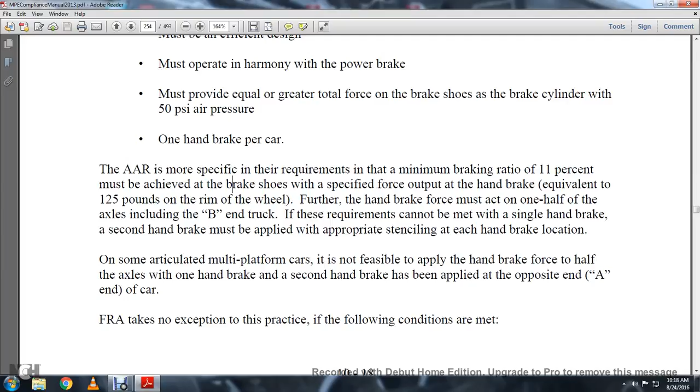The Association of American Railroads specified this requirement: a minimum braking ratio of 11% must be achieved at the brake shoes, with specified force output of the handbrake equivalent to 125 pounds on the rim of the wheel. Further, handbrakes must act on one half of the axles, including B end of the truck. This requirement cannot be met with a single handbrake.

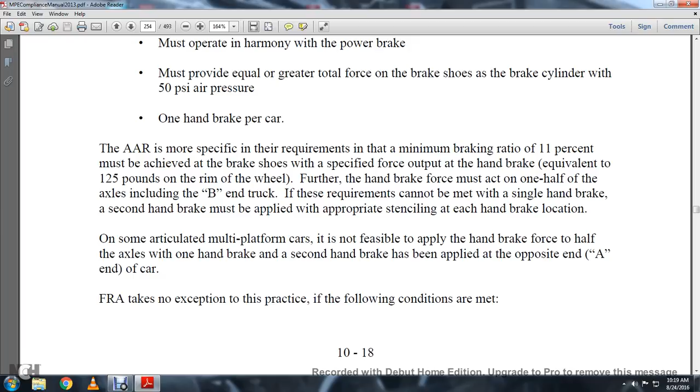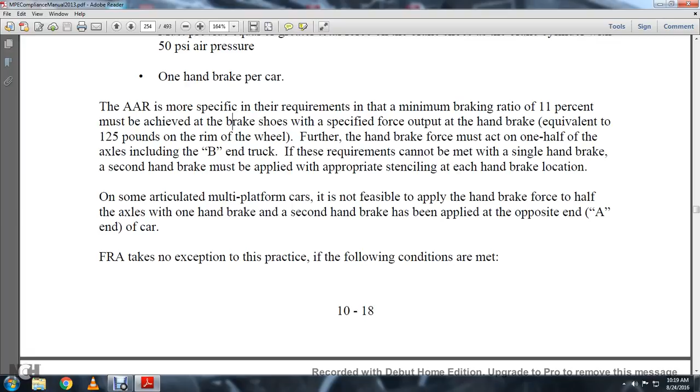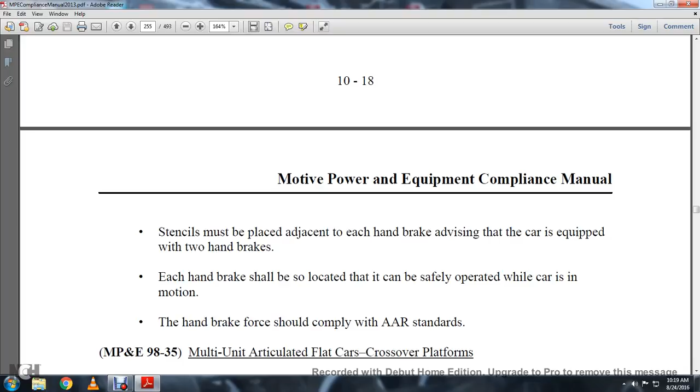A second handbrake must be applied on appropriate stenciling at each handbrake location. On some of the articulated multiple platform cars, it's not feasible to apply the handbrake force to half the axles with one handbrake, and the second handbrake has been applied at the opposite end, the A end of the car. The FRA takes no exceptions to this practice if the following conditions are met: stencils must be placed adjacent to each handbrake, advising the car is equipped with two handbrakes. Each handbrake shall be located so it can be safely operated while the car is in motion, and the handbrake force should comply with AAR standards.

Motive Power and Equipment 98-35. Multiple unit articulated flat cars, crossover platforms, trailer train companies or TTAX. 5-unit all-purpose spine cars are equipped with handbrakes and face outward at each end of the 5-unit consists. The handbrake arrangement is designed so that it can be operated while standing on a sill step or from the ground.

When a 48-foot container is placed on the A end of the unit and the crossover platform is partially covered, with the container only 10 inches exposed, the crossover platform extensions on the trailer train company cars, the multiple unit articulated flat cars, are not a requirement of the current safety appliance standards.

Additionally, they are not used for proper operation of the handbrakes. Therefore, the FRA will take no exceptions to the use of trailer train company's 5-unit all-purpose spine cars when loaded with an A and B unit 48-foot containers partially covering the end of the crossover platform.

However, the FRA requires safety appliance support. Safety appliances must be mechanically fastened, with brackets applied to the car structure, other than tank cars, solely for the securement of safety appliances mechanically fastened to the car structure.

Motive Power and Equipment 98-5. Standard level and low level auto racks. Since the origination of the radial door and its application of the auto rack cars. Many clearance problems have developed because of the nature of these, the vertical relationship of the side ladder and sill steps have been altered in such a manner that there are variations, misalignment of 5 to 13 inches.

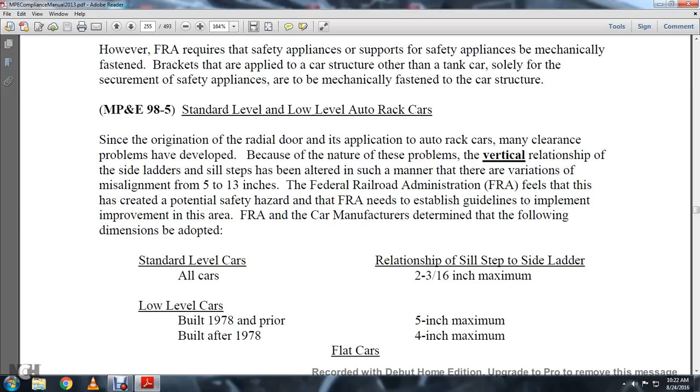Standard level cars are all level; low level cars built prior to 1978 versus built after 1978. The relationship for all level cars is 2 and 3/16 of an inch maximum between sill step and side ladder. For low level cars built in 1978 and prior, 5-inch maximum; after 1978, 4-inch maximum.

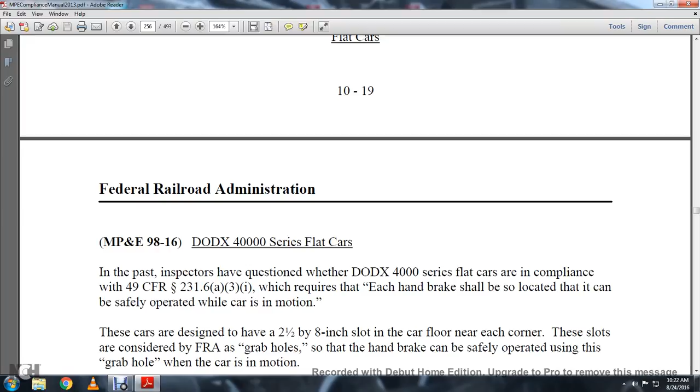Flat cars, Motive Power and Equipment 98-16, Department of Defense X 40,000 series flat cars. In the past, inspectors questioned the DODX 4000 series flat cars for compliance with Title 49 CFR 231.6A31, which requires that each handbrake shall be located so it can be safely operated while the car is in motion.

These cars are designed to have a 2.5 by 8-inch slot in the car floor near each of the corners. The slots are considered by FRA as a grab hole, so the handbrake can be safely operated using the grab hole while the car is in motion.

Also, it had been reported that these cars have a missing bottom rod safety support. These cars are equipped with Buckeye 6-wheel trucks with truck-mounted brakes. Because of the truck mounted brakes, the bottom rod requires safety support, found only on the hand brake truck. Of the two bottom rods, one is equipped with two safety supports, while the other has only one.

The truck, as designed, lacks a bracket and another location to which an effective safety support can be attached to the brake rod. The distance measures 35 inches between the pivot, and loss of the connection between the pin and unsupported end of the rod would cause a drop of 1/2 inch over the distance of 7 inches before it encountered the existing safety support.

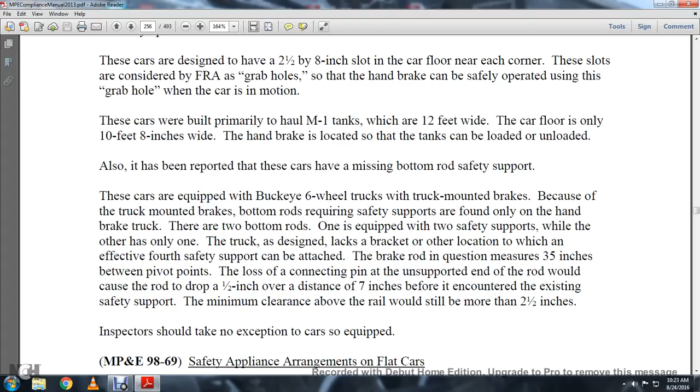The minimum clearance above the rail would still be more than 2.5 inches. Inspectors should take no exception to the cars so equipped.

Motive Power and Equipment 98-69, Safety Appliance Arrangements on Flat Cars.

Statute 231.6 specifies the minimum required safety appliances on a flat car. However, various arrangements have been agreed upon without being incorporated in the standards. There are newly reassigned employees as well as new car builders who may not be aware of these agreements.

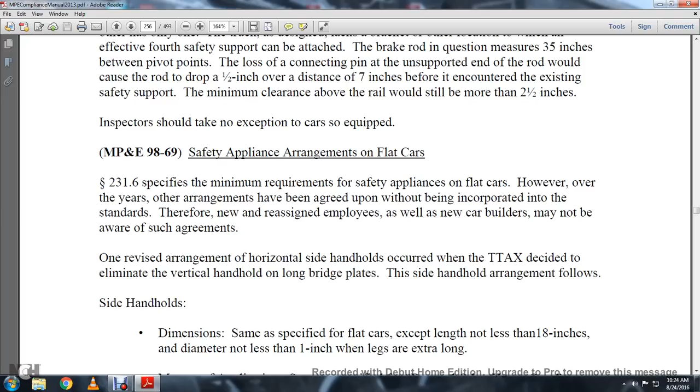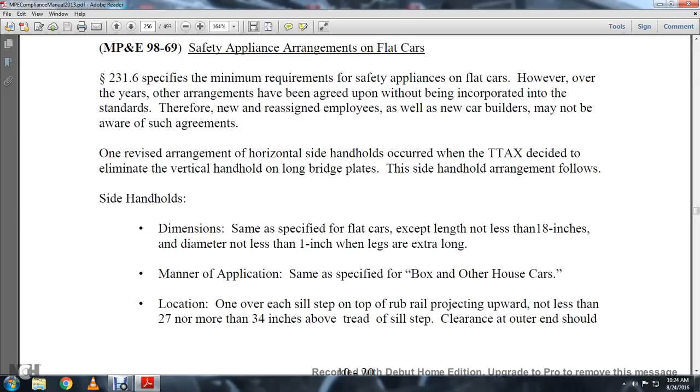One revised arrangement of the horizontal side handholds occurred when the Trailer Train Company decided to eliminate the vertical handhold on the long bridge plates. The side handhold arrangement follows: side handholds dimensioned the same as specified on the flat car, except the length not less than 18 inches, the diameter not less than 1 inch when the legs are extra long. Manner of application same as specified for box and other house cars. Location: one over

every sill step, on top of the rub rail, projecting upward not less than 27 nor more than 34 inches above the tread of the sill step. Clearance at the outer end may not be more than 8 inches from the end of the car. All other safety appliances on piggyback cars should conform with those specified for flat cars.

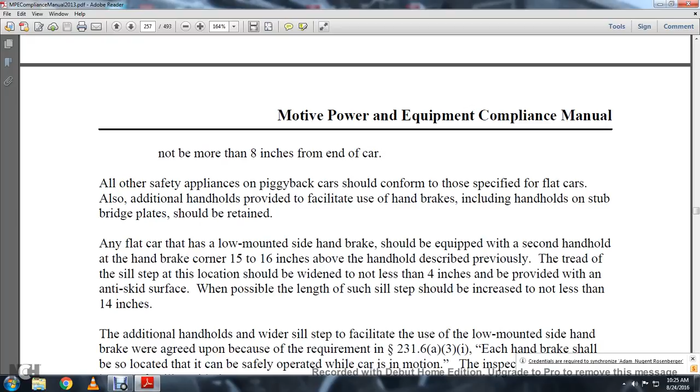In addition, the handholds provided to facilitate use of handbrakes, including handholds on the stub of the bridge plate, should be retained. Any flat car that has a low-mounted side handbrake should be equipped with a second handhold, the handbrake corner, 15 to 16 inches above the handhold as described previously.

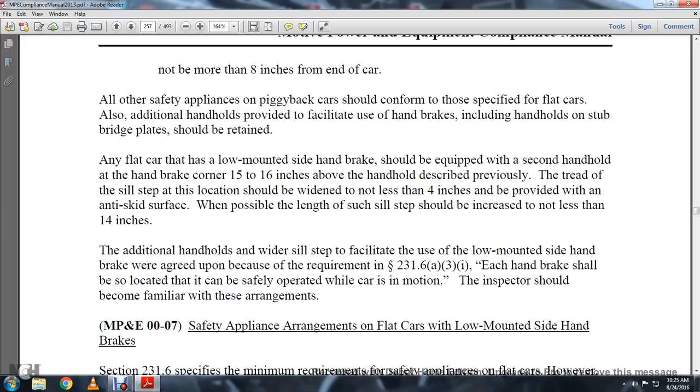The tread of the sill step at that location should be widened to not less than 4 inches, and be provided with an anti-skid surface. When possible, the length of such a sill step should be increased to not less than 14 inches. The additional handhold, wider sill steps, to facilitate the use of low-mounted side handbrakes was agreed upon because of the requirement in

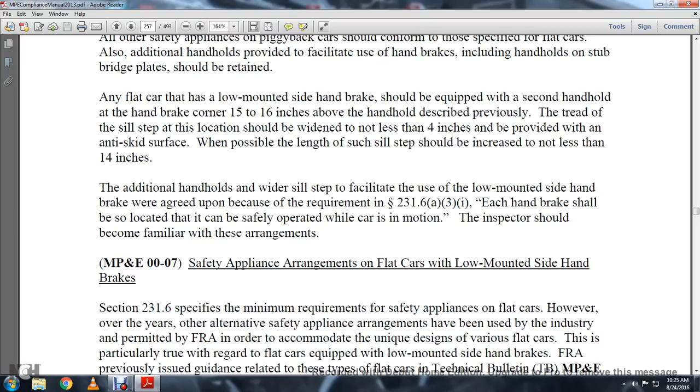231.6(a)(3)(i): each handbrake shall be located so that it can be safely operated while the car is in motion. The inspector should be familiar with these arrangements.

Motive Power and Equipment, Safety Appliance Arrangements on Flat Cars with Low-Mounted Side Handbrakes. Section 231.6 specifies the minimum required safety appliances for flat cars.

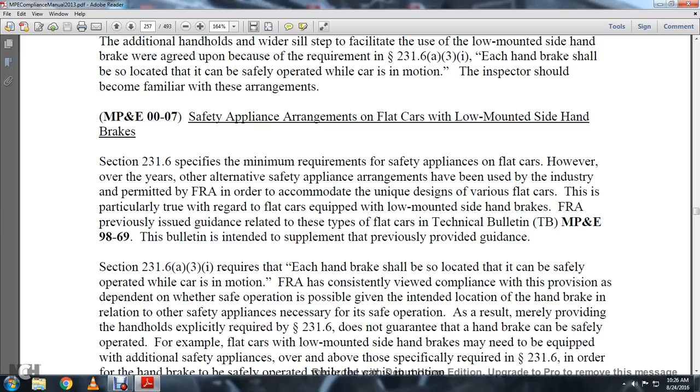However, over the years, alternative safety appliance arrangements have been used by the industry and permitted by the FRA in order to accommodate the unique design of various flat cars. This is particularly true with regard to flat cars equipped with low-mounted side handbrakes. The FRA previously issued guidelines related to these flat cars in the technical bulletin, Motive Power and Equipment 98-69. This bulletin is intended to supplement the previously provided guidance.

Section 231.6(a)(3)(i) requires each handbrake be located so that it can be safely operated while the car is in motion. The FRA has consistently viewed compliance with this provision as dependent on whether safe operation is possible given the intended location of the handbrake in relation to other safety appliances necessary for safe operation.

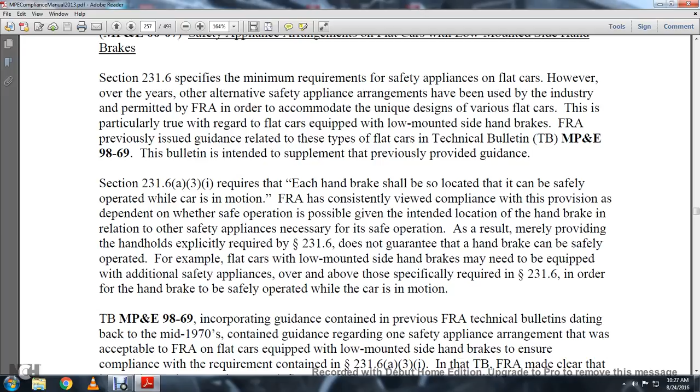As a result, merely providing the handholds explicitly required in Statute 231.6 does not guarantee that the handbrake can be safely operated. For example, flat cars with low-mounted side handbrakes may need additional safety appliances beyond those specifically required in 231.6 in order for the handbrake to be safely operated while the car is in motion. Technical Bulletin Motive Power and Equipment 98-69 incorporates guidelines contained in previous FRA technical bulletins dating back to the mid-1970s, containing guidance regarding a safety appliance arrangement acceptable to the FRA on flat cars equipped with low-mounted side handbrakes to ensure compliance with the requirement in Statute 231.6(a)(3)(i).

In the technical bulletin, the FRA made it clear that it would not take exception to such flat cars if they were equipped with a second handhold at the handbrake corner, 15 to 16 inches above the handhold, located over each of the sill steps. The tread of the sill step at that location was widened to not less than 4 inches and provided with an anti-skid surface.

When possible, the length of such a sill step was increased to not less than 14 inches. Such guidance would not impose new requirements, but provided industry with current means to comply with the existing requirements in Statute 231.6(a)(3)(i).

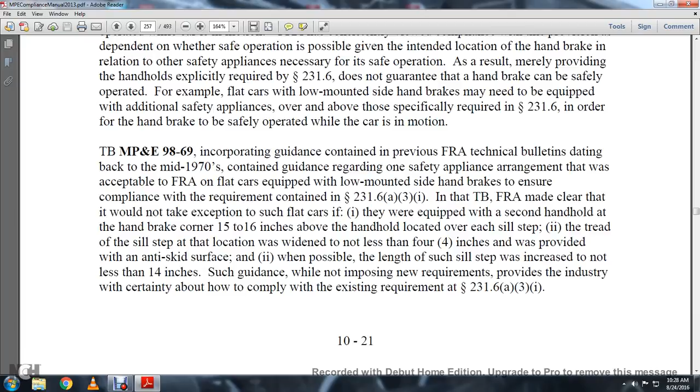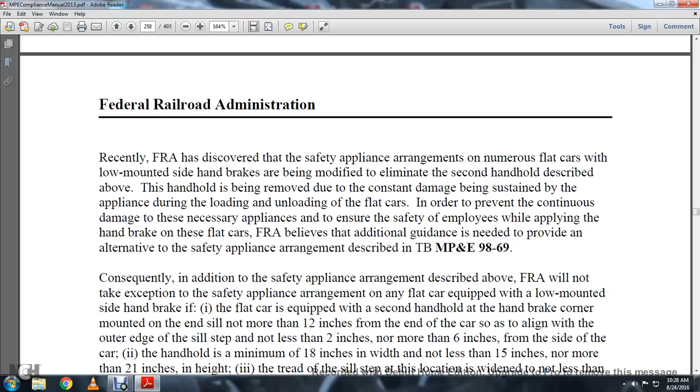Recently, the FRA has discovered the safety appliance arrangement on numerous flat cars with low-mounted side handbrakes being modified to eliminate the second handhold described above. The handhold is being removed due to constant damage being sustained by the appliances during loading and unloading of the flat cars. In order to prevent this continuous damage, while ensuring the safety of employees applying the handbrake on these flat cars, the FRA believes additional guidance is needed to provide an alternative safety appliance arrangement to that described in Technical Bulletin Motive Power and Equipment 98-69.

Consequently, in addition to the safety appliance arrangements previously described, the FRA will not take exception to the safety appliance arrangements on any flat car equipped with a low-mounted side handbrake if: one, the flat car is equipped with a second handhold at the handbrake corner, mounted on each end of the sill, not more than 12 inches from the end of the car so it aligns with the outer edge of the sill step, and not less than 2 inches nor more than 6 inches from the side of the car; two, the handhold is a minimum of 18 inches in width and not less than 15 inches, nor more than 21 inches in height.

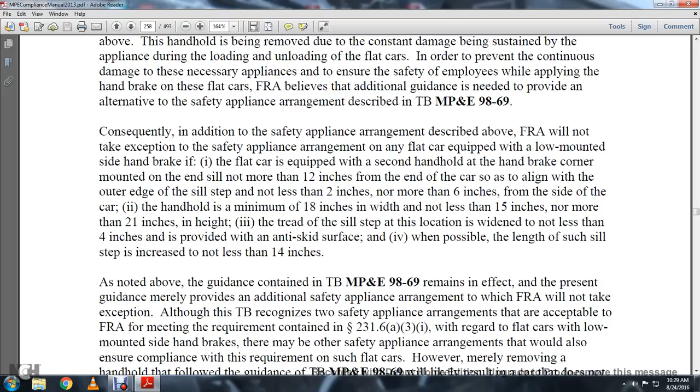The tread of the sill step at this location is widened to not less than 4 inches, provided with an anti-skid surface. When possible, the length of the sill steps should increase to not less than 14 inches.

As noted in guidance contained in Technical Bulletin Motive Power and Equipment 98-69, which remains in effect with the present guidance, merely providing an additional safety appliance arrangement means the FRA will not take exception. The Technical Bulletin recognizes two safety appliance arrangements acceptable to the FRA, meeting the requirements contained within Statute 231.6(a)(3)(i).

With regard to flat cars and low-mounted side handbrakes, there may be other safety appliance arrangements that would also ensure compliance with the requirements for such flat cars.

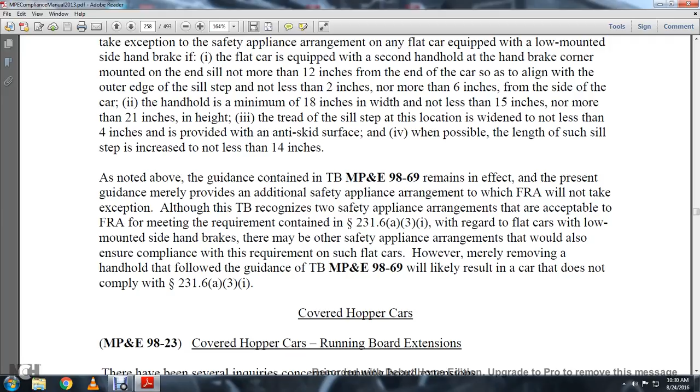However, merely removing the handhold from the guidance of Technical Bulletin Motive Power and Equipment 98-69 will likely result in a car that does not comply with Statute 231.6(a)(3)(i).

Covered hopper cars, Motive Power and Equipment 98-23: covered hopper cars running board extension. There have been several inquiries concerning running board extension. The FRA's position is that the running board extension is not required if the end of the longitudinal running board at least 6 inches from the vertical plane.

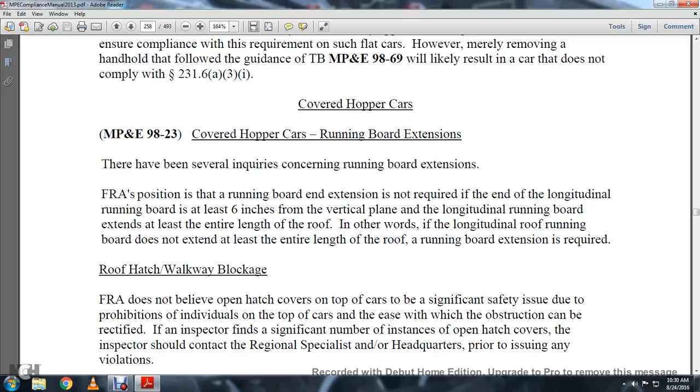If the longitudinal running board extends at least the entire length of the roof, no extension is required. In other words, if the longitudinal roof running board does not extend at least the entire length of the roof, the running board extension is required.

The roof or hatch walkway blockage: the FRA does not believe open hatch covers on top of the cars to be a significant safety issue, due to the prohibition of individuals on top of the cars.

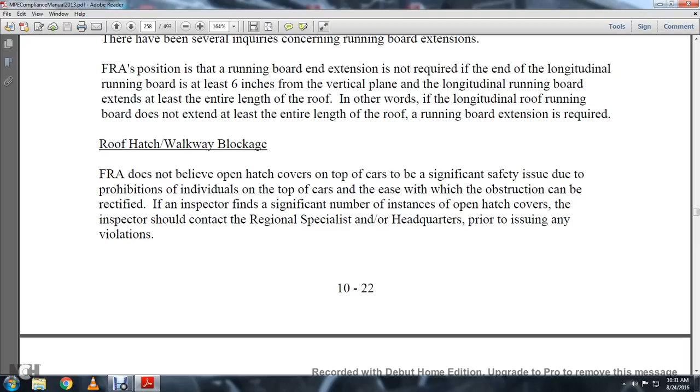The ease with which the obstruction can be rectified should be considered. If an inspector finds a significant number of instances of open hatch covers, the inspector should contact the regional specialist or headquarters prior to issuing a violation.

Cars of special construction, Motive Power and Equipment 98-17: bulkhead flat cars. Although safety appliances regulations do not specifically address bulkhead flat cars, these cars will be considered cars of special construction, Section 231.18.

The statute states that cars of special construction must be equipped, as nearly as possible, with the handhold, sill steps, ladders, handbrakes, and running boards that are required for cars of the nearest approximate type.

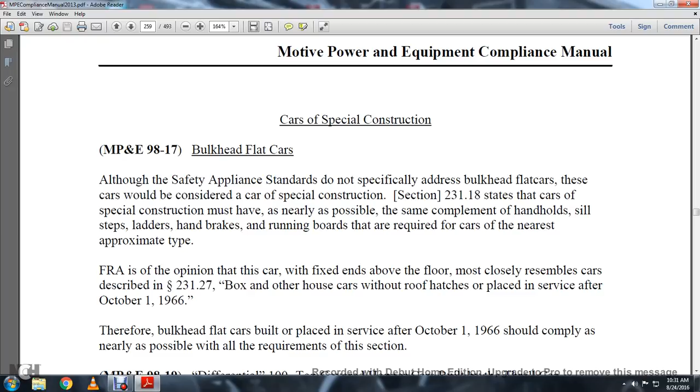In the FRA's opinion, bulkhead flat cars with fixed ends most closely resemble the cars described in Statute 231.27: box cars and other house cars without roof hatches, placed in service after October 1st, 1966.

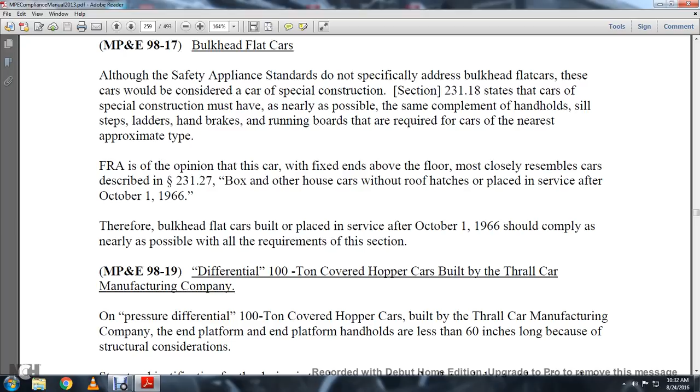Therefore, bulkhead flat cars placed in service on or after October 1st, 1966 should comply as nearly as possible with the requirements of that section.

Motive Power and Equipment 98-19: differential pressure 100-ton covered hopper cars built by the Thrall Car Manufacturing Company. On these pressure differential 100-ton covered hopper cars, end platform handholds are less than 60 inches long. The structural justification for this design is to place the support on the flat end sheet in this location, preventing overstressing of the sheet when the car is pressurized.

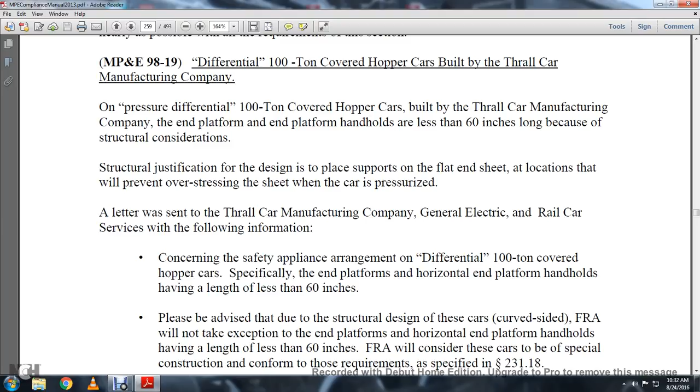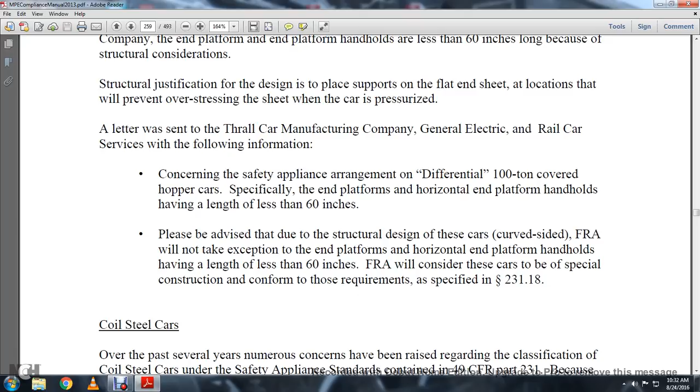A letter was sent to the Thrall Car Manufacturing Company, General Electric, and Rail Car Services with the following information, concerning the safety appliance arrangement on differential pressure 100-ton covered hopper cars, specifically end platform handholds having a length of less than 60 inches.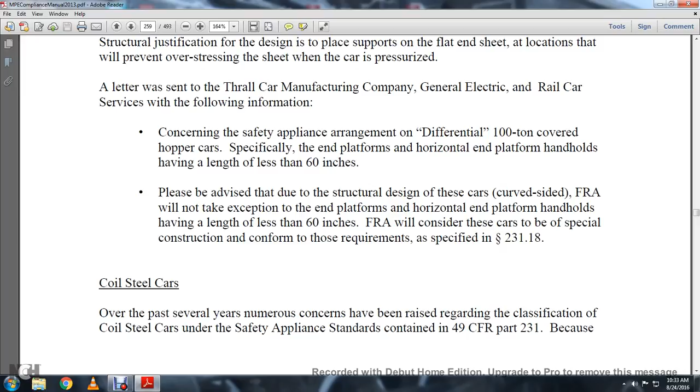Due to the structural design of these cars, the FRA will not take exception to the end platform horizontal handholds having a length less than 60 inches. The FRA will consider these cars to be of special construction, conforming with the requirements specified in Statute Section 231.18.

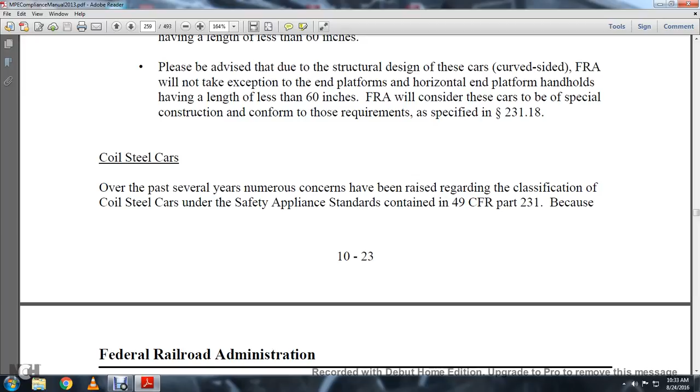Coil steel cars: over the past several years, numerous concerns have been raised regarding the classification of coil steel cars under safety appliance standards compliance with Title 49 CFR Part 231, because coil steel cars do not conform to any of the other cars specifically identified in Part 231.

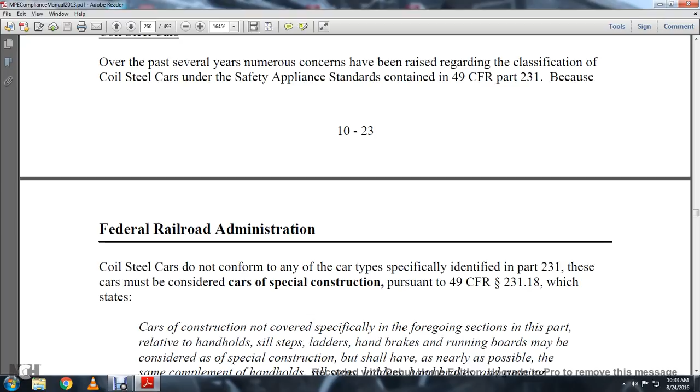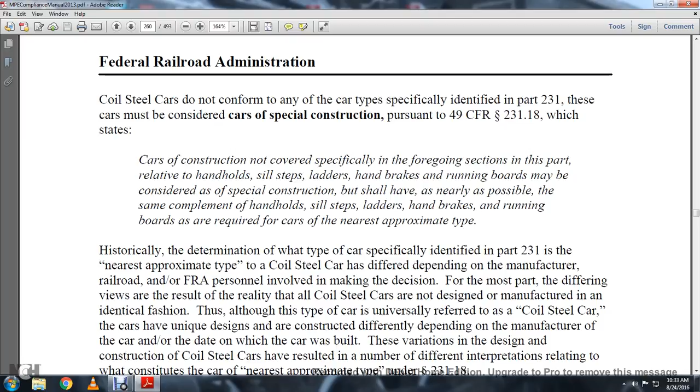These cars must therefore be considered cars of special construction pursuant to Title 49 CFR 231.18, which states that cars of construction not specifically covered in this part, relative to handholds, sill steps, ladders, handbrakes, and running boards, may be considered special construction, but shall be equipped as nearly as possible complementing the handholds, sill steps, ladders, handbrakes, and running boards required for the car of the nearest approximate type.

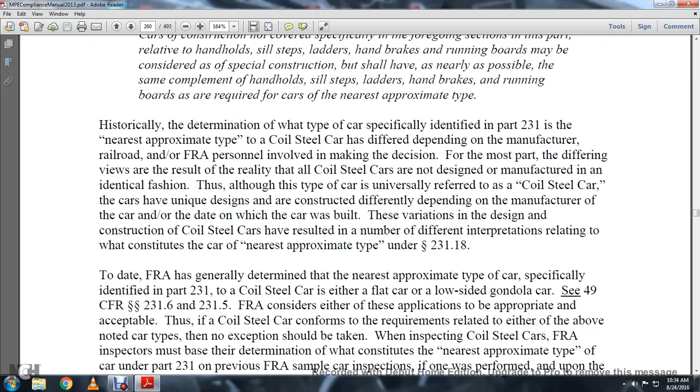Historically, the determination of what type the coil steel car is most specifically identified with under Part 231, and the nearest approximate type, differed depending on the manufacturer and railroad. FRA personnel were involved in making this decision, with differing views resulting from the reality that coil steel cars are not manufactured in any identical fashion. Thus, although the car is universally referred to as a coil steel car, its unique design was constructed differently depending on the manufacturer and the date the car was built. This variation in design and construction resulted in a number of different interpretations relating to what constitutes the nearest approximate type under Statute 231.18.

To date, the FRA has generally determined that the nearest approximate type of car specifically identified in Part 231 for the coil steel car is either the flat car or the low-sided gondola. See Title 49 CFR 231.6 and 231.5. The FRA considers either of these applications to be appropriate and acceptable.

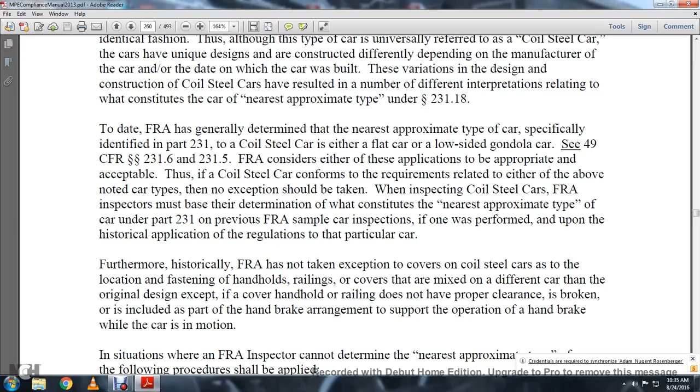When inspecting coil steel cars, the FRA inspector must determine what constitutes the nearest approximate type of car under Part 231, and should refer to any previous FRA sample car inspection, if one was performed, regarding the historical application of regulations to that particular car.

Furthermore, historically, the FRA has not taken exceptions to covers on coil steel cars at the location of fastened handholds, railings, or coverings that are mixed with a different car type than originally designed.

Exceptions apply if the covered handhold or railing does not provide proper clearance, if it's broken, or if it's included as part of the handbrake arrangement needed to support operation of the handbrake while the car is in motion.

In a situation where the FRA inspector cannot determine the nearest approximate type of the car, the following procedure shall be applied: the inspector should request from the operating railroad the letter issued by the FRA relating to the sample car inspection performed on that series of car, indicating the sample car inspection car type.

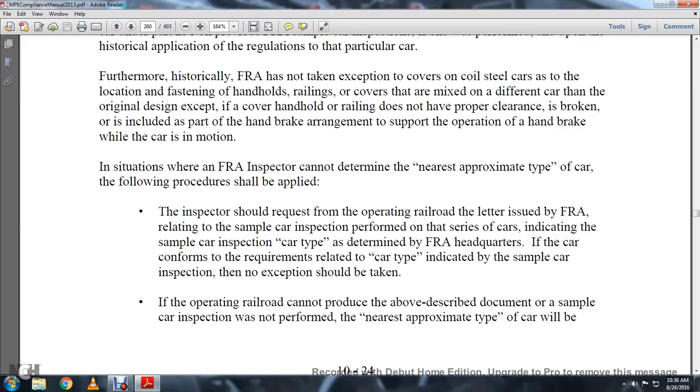This determination is made by FRA headquarters. If the car conforms to the requirements related to the car type indicated in the sample car inspection, then no exception should be taken.

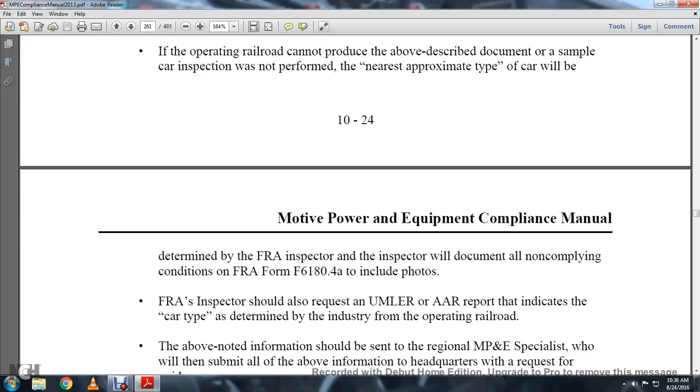If the operating railroad cannot produce the above described document or a sample car inspection was not performed, the nearest approximate type of the car will be determined by the FRA inspector, who must document all non-complying conditions on FRA Form F6180.4a, including photos.

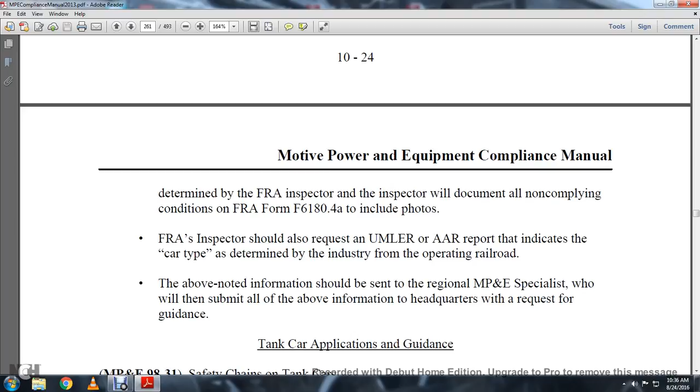The FRA inspector should request the UMLER or Association of American Railroads report that indicates the car type determined by the industry from the operating railroad. This information should be sent to the regional motive power and equipment specialist, who then submits all the information to headquarters with a request for guidance.

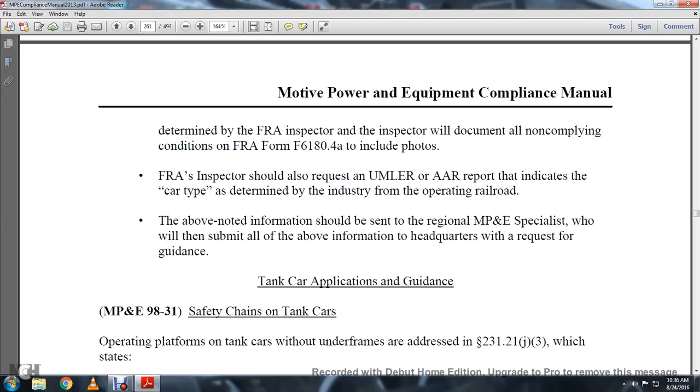Tank car applications and guidance, Motive Power and Equipment 9831, safety chains on tank cars, operating platforms on tank cars without underframes, are addressed in Statute 231.21J3, which states the open platform is to be of sufficient length, providing access to operating fittings, with the ladder located on the side of the car at the center.

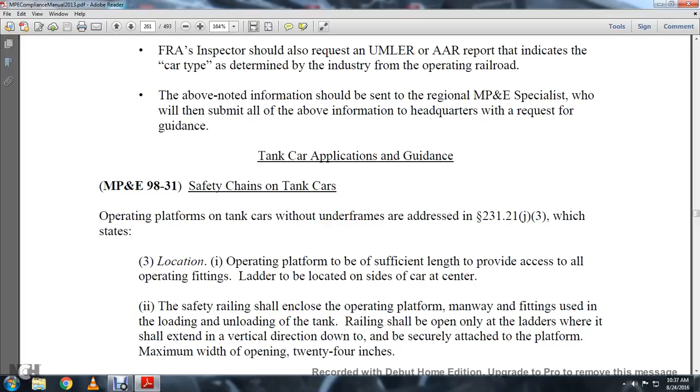The safety railing should enclose the operating platform. Manway fittings used to load and unload the tank railing shall be open only at the ladders, where it shall extend in the vertical direction down and be securely attached to the platform.

The maximum width of the opening is 24 inches. Additionally, there are tank cars constructed with top operating platforms with the ladders at each end of the tank car rather than a side ladder.

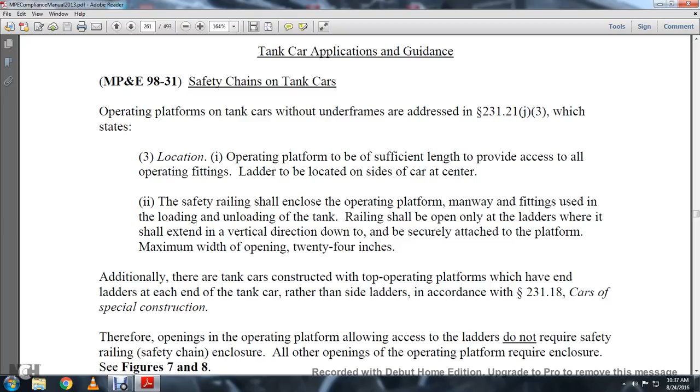In accordance with Statute 231.18, for cars of special construction, openings in the operating platform allowing access to ladders do not require safety railing or safety chain enclosures, all other openings of the operating platform do require enclosure.

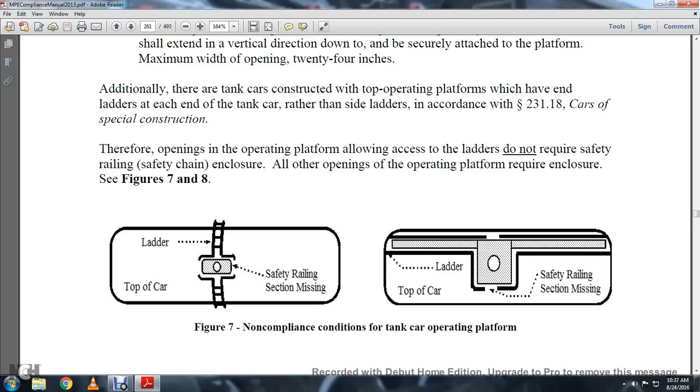See Figures 7 and 8, which shows the ladder in the middle of the car with a safety railing section missing, and the top ladder on top of the car with a safety railing section missing, going around the dome.

Figure 8 shows compliant railing, compared to these examples of non-compliant tank car railing.

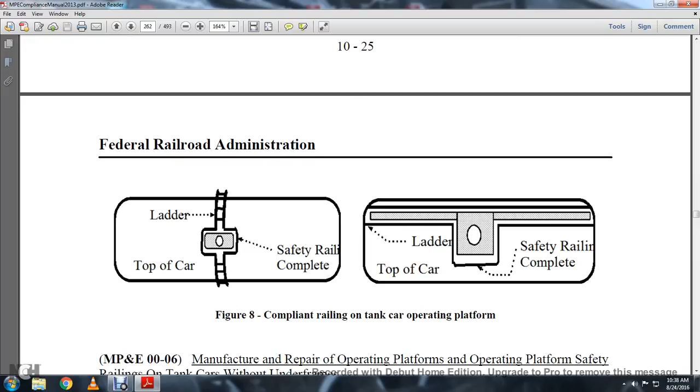Compliant railing on the tank car operating platform: a ladder with the safety railing complete, and a ladder at the top of the car with the safety railing complete.

Motive Power and Equipment 00-06: manufacturing or repairing operating platform, or operating platform safety railing on tank cars without underframe. Section 231.21J specifies minimum requirements for operating platforms on tank cars without underframes.

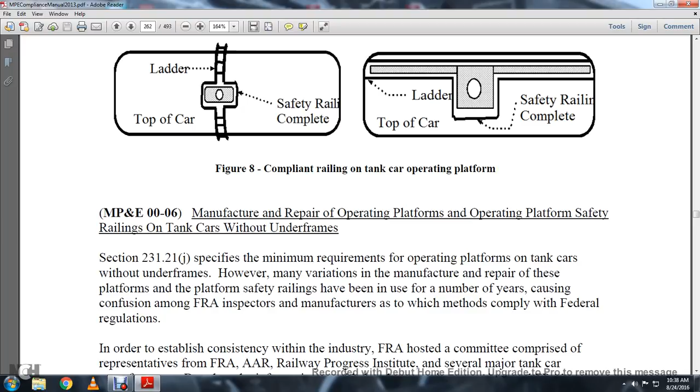However, there is much variation among manufacturers in repairing these platforms. Platform safety railings have been built in a number of different ways over the years, causing confusion among FRA inspectors and manufacturers as to which methods comply with federal regulations.

In order to establish consistency within the industry, the FRA hosted a committee comprised of representatives of the FRA, the Association of American Railroads, the Railway Progress Institute, and several major tank car manufacturers, based on information provided during committee meetings prior to this FRA guidance.

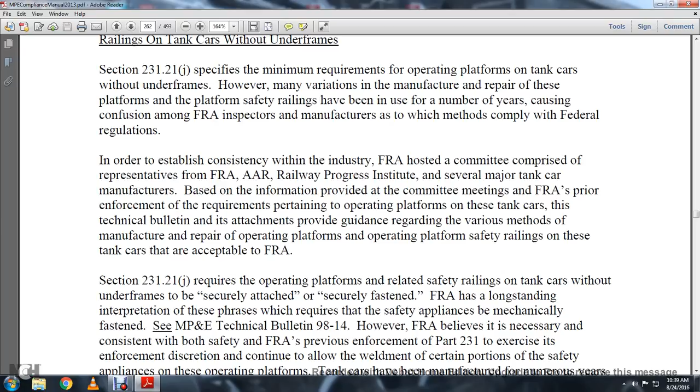This resulted in enforcement requirements pertaining to operating platforms on tank cars. These technical bulletins, attached here, provide guidance regarding the various methods of manufacturing or repairing operating platform safety railings on tank cars that are acceptable to the FRA.

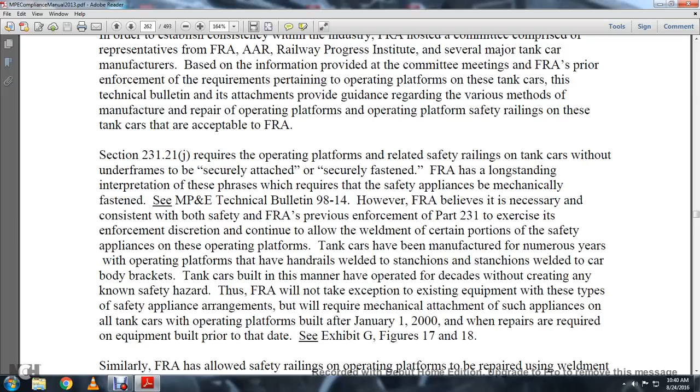These types of safety appliance arrangements will require mechanical attachment of the safety appliance on tanker car operating platforms built after January 1st, 2000, with repairs required on equipment built prior to that date. See Exhibit G for Figures 17 and 18.

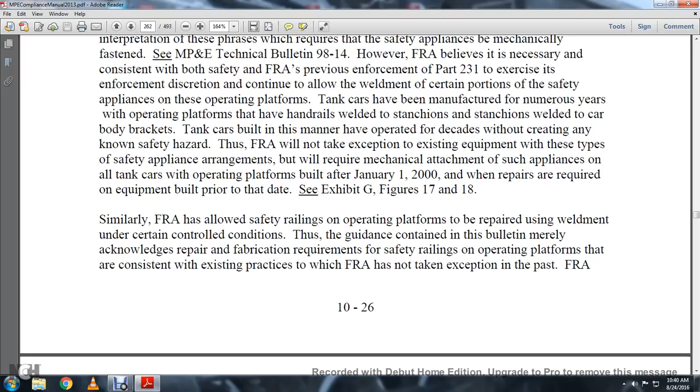Similarly, the FRA has allowed safety railings on operating platforms to be repaired with the use of weldment under certain controlled conditions. The guidance contained in the bulletin merely acknowledges the repair and fabrication requirements of safety railings on operating platforms, consistent with existing practices to which the FRA has not taken exception in the past.

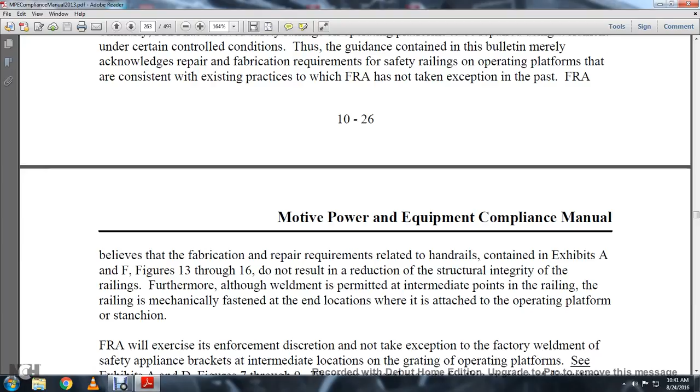The FRA believes the fabrication and repair requirements related to handrails, contained in Exhibits A and F, Figures 13-16, do not result in a reduction of structural integrity of the railings. Furthermore, weldment is permitted at intermediate points of the railing. The railing is mechanically fastened at the end location where it attaches to the operating platform or stanchion.

FRA will exercise enforcement discretion and not take exception to factory weldment of the safety appliance brackets at the intermediate location of the grating operating platform. See Exhibit A and D, Figures 7 through 9. There are several reasons for this exercise of discretion.

Gratings used on operating platforms have been manufactured for years with these intermediate brackets being directly welded to the gratings. The FRA is not aware of any safety hazards arising from this design. Furthermore, due to the high quality of factory welds, a mechanical fastener would add little or no structural strength to the attachment.

In addition, this type of welding will be permitted only at the intermediate brackets where less stress is being placed on the attachment. The platform attachments to the end support will be required to be mechanically fastened. See Exhibits A and C for Figures 6 and 6A.

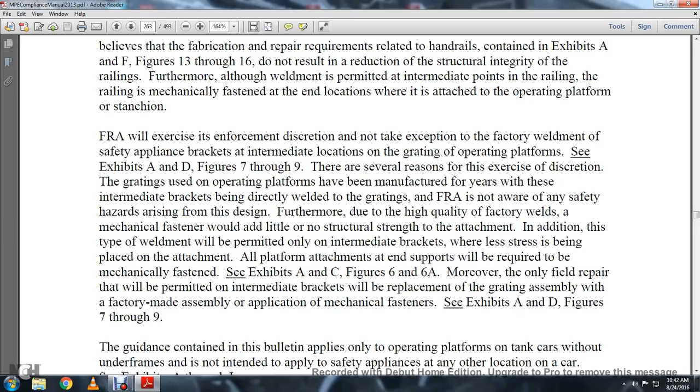Moreover, the only field repair permitted at the intermediate brackets will be to replace the grating assembly with a factory-made assembly or application of mechanical fasteners. See Exhibit A and D, Figures 7 through 9.

Figures 7 through 9. The guidance contained in the bulletin applies to the operating platforms on tank cars without underframes and is not intended to apply to safety appliances at any other location on the cars. See Exhibits A through I.

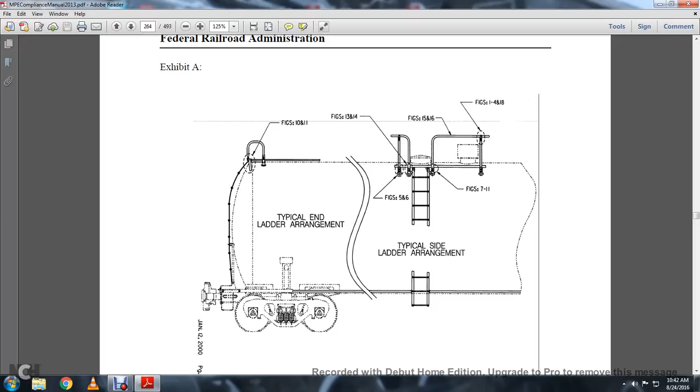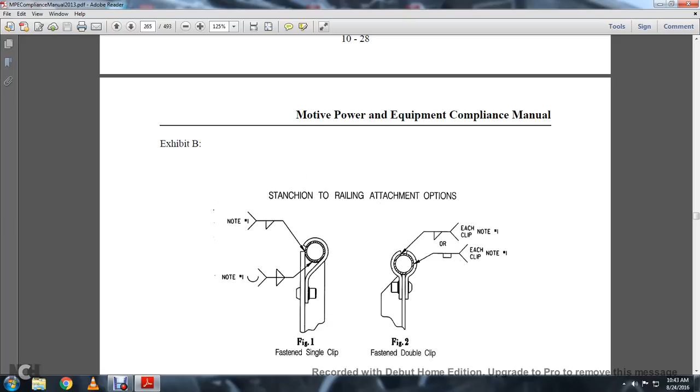Figure 1, fastened single clip. This is a double clip which goes on the double side of it, a fillet and a box weld, I guess. Box weld around a wraparound, Figure 3, and are fastened with a bolt.

Welding in addition to mechanical fasteners is acceptable. Optionally, additional thread fasteners are acceptable.

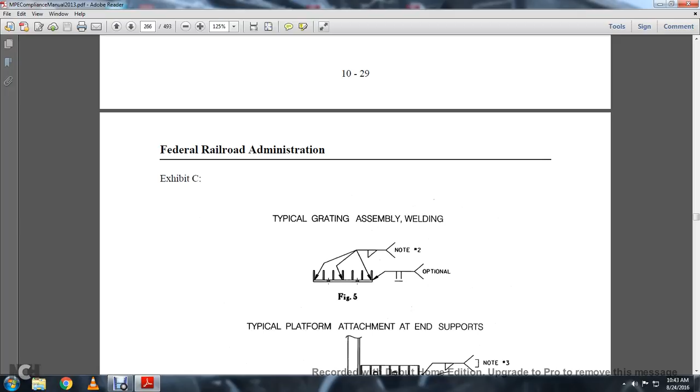Exhibit C is a typical grating assembly of welding. This shows fillet welds and the option of a parallel flush double flat weld. Typical platform attachment: fillet weld, bolts.

Factory welds, mechanical fasteners acceptable securement at these locations; field requirements require mechanical fastener factory-made assembly. Note number 3: field welding acceptable at these locations.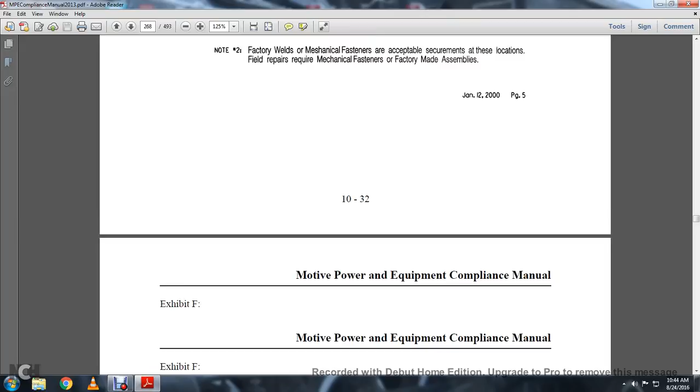Fabrication or repair of pipe railing. See note 4, typical reinforcement insert where flattened. Typical repair, see note 5. Flush weld around the contour of the railing.

Well, flush weld in the center of 5.5 of 11 inches, and also 5.5 and 11 inches, divided by a double fillet weld.

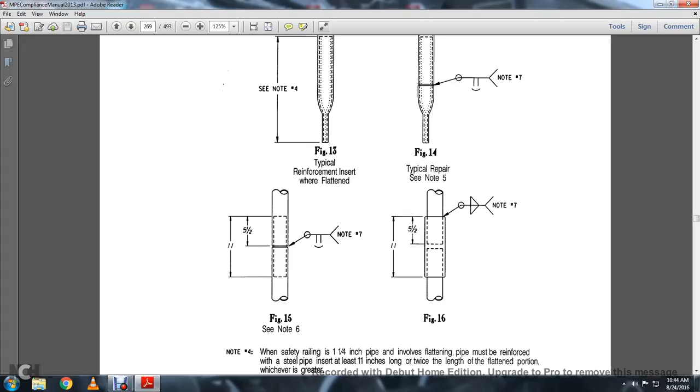Another fillet weld, bracket attachment, railing extension and attachment, double-sided fillet weld, and a contour. I don't know what that is.

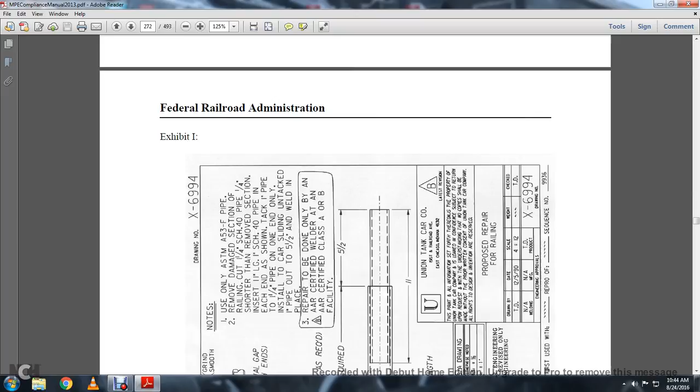These are railing applications, and welcome to Chapter 11: Braking System Safety Standards for Freight and Other Non-Passenger Train Equipment, End of Train Device, Part 232.